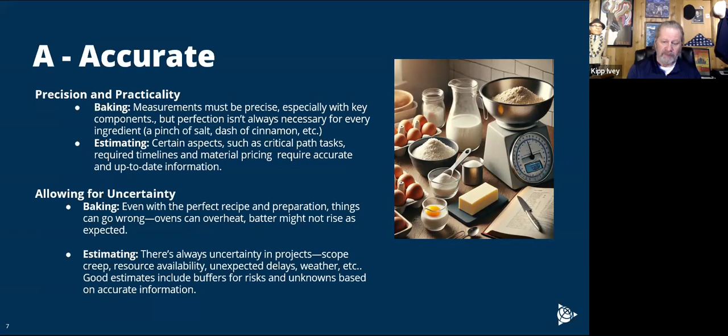And we will be providing some tactical tips and best practices for you, just as recommendations for how you can really revolutionize your estimating practice so that you are able to deliver those complete, accurate, knowledge-based, and effective estimates, and ultimately have more success through projects and achieve the ROI you're looking for as well. So stay tuned for the end of our webinar. We'll be walking through some practical tips and tricks as well.

Yeah, and you're right. The goal here is we're gonna walk through this. We'll talk about the acronym that we're actively working on right now, and then we're gonna dive into the software and try to show you some nuances of how we can put the information together using some of the tools that I have available to me today. Because like Caprice said, when you think about an estimating solution, the ROI for the estimating solution is all about time, productivity, and accuracy. Those are the three components of how an estimating software pays for itself. And we'll cover that as well.

So when you think about knowledge, right, we already talked about adjusting when necessary. But more importantly, just like cake recipes are handed down generationally, across families. As a matter of fact, my wife for the last number of weeks has been going through boxes and boxes of information and finding recipes from her grandmother and her mother who recently passed away, and my mother who had passed away. And you can tell whose recipes they are by the handwriting. For her, it's a very emotional thing, right? Because those recipes were handed down throughout the generations, and in the world of construction, the same thing exists with knowledge.

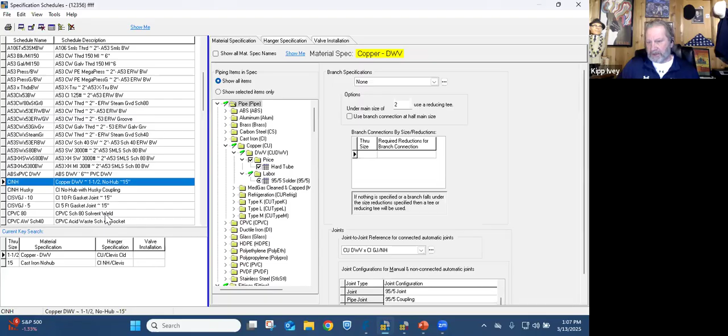If you look at the cast iron no hub spec, right? 1.5 inches down is copper DWV. Anything larger than that is going to be cast iron no hub. This information, once again, is out of the box. And you can tweak these. I can certainly click on any of these specifications. I can duplicate it and then edit it and create my own spec for my own organization based, once again, upon your knowledge. Because like I said, this is a very integrated platform.

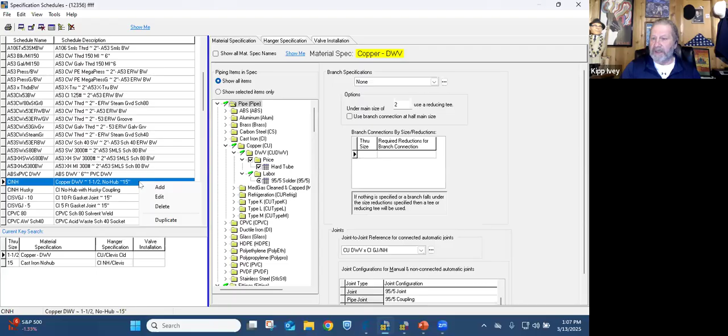If we get out of the specifications and you start thinking about, well, what else do I need, right? Obviously, labor is a huge factor. So out of the box, you could have multiple labor books. Those labor books, for example, could be PHCC. We have what we call our standard labor base, our labor tables, as well as you can bring in the MCAA labor tables, and even now with the new database, you can bring in the MCAA WAM labor method.

Obviously, you have to have access to the MCAA labor rate for us to give you that information. You have to have access to the PHCC labor book for us to give you that information. But these labor books can be built for you, and you can create as many labor tables as you want so that you can adjust them, once again, based upon your knowledge. But out of the box, we're giving you the right ingredients. And from there, you're going to tweak those ingredients for your organization and how you're going to use the software.

Now, accuracy. I think the easiest way to talk about accuracy is hangers. So I'm going to go into takeoff here, and I'm going to show you something. All right, let's go to a different job. Helps if you do the right things, right, Kip? Let's go to a recent project. Let's go to a project that's got a little more information on it.

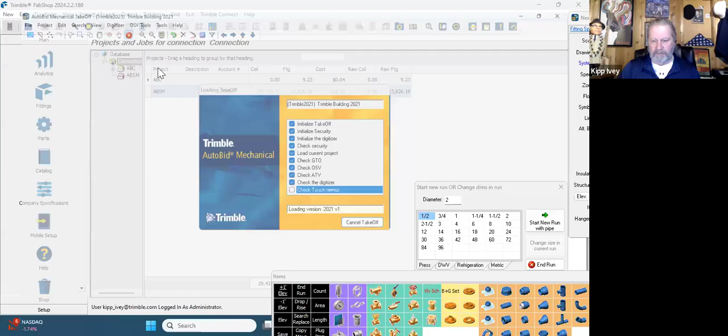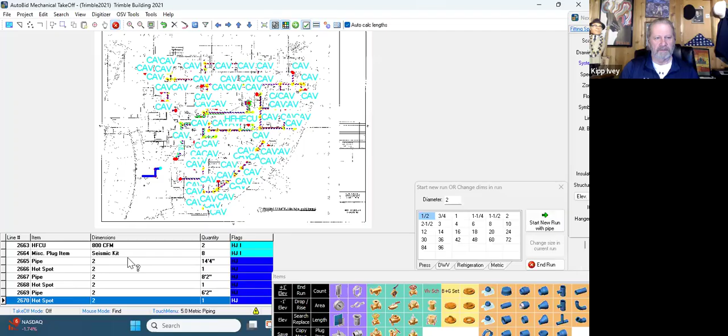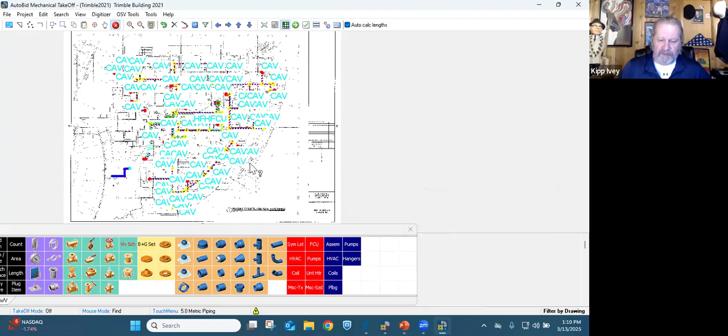All right. I'm going to zoom in on this drawing here. Maybe. Everything is off my screens here. There we go. All right, so in this particular drawing, we've got pipe valves and fittings, and it will not let me zoom. There it goes. I guess the graphics need to get caught up with this, Caprice.

So here we're sitting here, and I'm looking at pipe valves and fittings. So I can look at this particular system and I can simply touch on that, and it tells me, for example, that is heating hot water supply, copper by butt weld, 2 inches down is copper, everything else is carbon steel butt welded pipe. I know that it's on the 3rd floor. I know what drawing it's on.

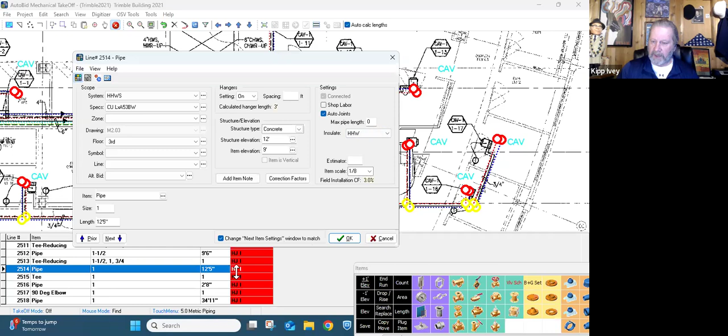I'm creating accurate information. I'm automatically creating joints, and I'm also automatically creating hangers. Because you'll notice down here it says HJI. It means I'm creating hangers, I'm creating joints, and this pipe is insulated. So you're going to get your saddle shields that go along with your hanger components.

But unlike some, when you start thinking about hangers, many of us that have estimated manually in the past, we take lineal footages of ductwork or lineal footages of pipe, and we say our nominal spacing is going to be 8 feet. And we simply say, oh, I've got 240 feet of ductwork or 240 feet of pipe, and I divide by 8 feet, and I'm going to have 30 hangers.

Now, that may be good enough if you're going to do a quote, but if I'm going to do an estimate, I need to understand changes in direction. I need to understand fitting placement. I need to understand, is that pipe vertical or horizontal? I need to understand the length of the hanger. In our estimating world, I will give you those extra hangers at the change in direction, knowing that I have to have a hanger on both sides of a fitting. I'm going to turn off hangers in the vertical, turn the hangers back on at the top as I rise, let's say.

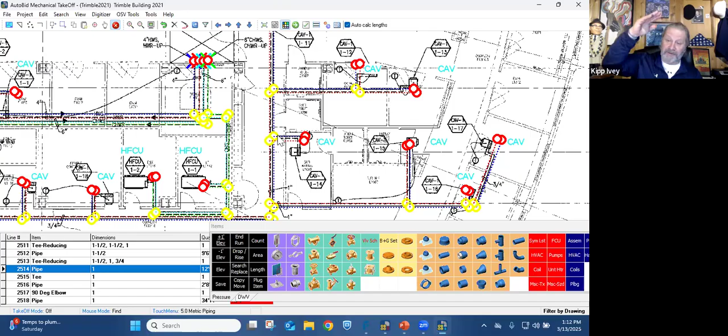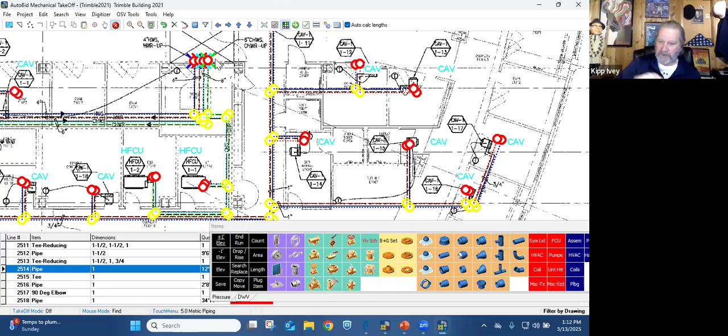And let's say it's a 15-foot structure and I'm hanging pipe at 8 feet. So I'm going to generate a 7-foot hanger. And now all of a sudden I go vertically, which is what this X stands for. I go vertically, and now instead of hanging that pipe at 8 feet, I'm now hanging at 10 feet. And the hanger is going to go from 7 feet to 5 until I go back down. Because we're going to generate an accurate hanger count. We're going to generate an accurate bill of materials based upon what's actually occurring in the field and not just some arbitrary number.

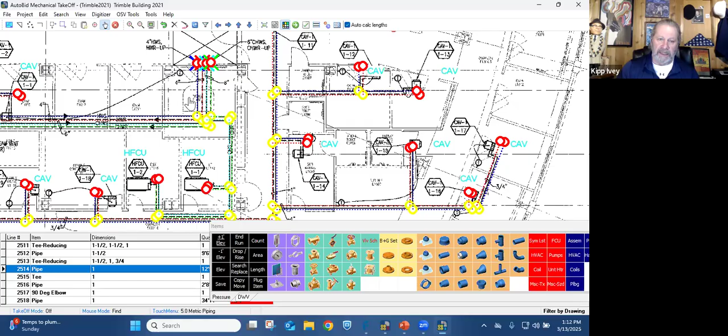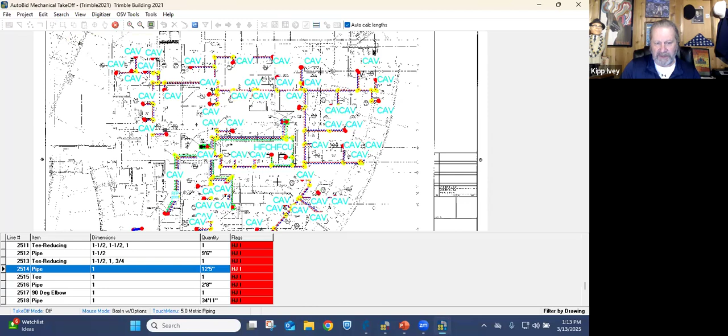Now, if I needed to adjust something, I know, for example, this is heating hot water and it's insulated. Well, what if they came out and said it shouldn't have been insulated, it should have just been bare pipe? So at that point, we start talking about how I can apply my knowledge into the software. How can I make adjustments, right? This box in feature is one of those tools. So if I hit this box in feature, I can drag a box around it, and it's going to ask me, all right, what do you want to do with everything that's contained within that box?

Now, what I'm showing you mechanically is exactly how the sheet metal works. So whether you're working on the wet side of the industry or the dry side of the industry, it does not matter. This feature is ubiquitous across both applications. So I can zoom in on an area, I can delete that pipe, I can create an assembly of that pipe. If you remember, we started talking about making sure I have the right ingredients. Do I have the right historical information?

Anybody that's worked in the mechanical industry knows that when you put in one heat pump, you probably put in 100. So why not create an assembly of a heat pump? Or, once again, if you know your job and I look at my plans and specs, I'm constantly, as an estimator, looking for commonality because I want to increase my efficiency as an estimator the most I possibly can. So by zooming in on something, I could create an assembly of an entire floor, let's say if I had common floors across a high-rise structure, or an assembly of that heat pump, or of that air handling unit, and I can save those assemblies for future use.

Now we're shipping you probably close to 100 assemblies already predefined, but you can create them on the fly. You can create them to keep for future reference, for the historical information, that historical metric. So that knowledge can be passed down generations, just like recipes are passed down from generation to generation. If I can create an assembly of an area, of a bathroom, I can have assemblies in my assemblies.

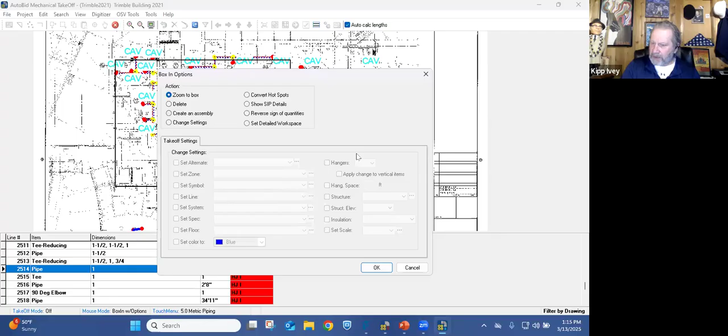But what if I want to change my hanger spacing in that location? Or in this instance, I simply just want to change the insulation from heating hot water, chilled water to none. The minute I do that and I recalculate this job, everything around my hanger components, my saddle shields will drop because I don't need them anymore. Right? I don't need the shields for the insulation.

So all that happens for you automatically, and it gives you the ability to impart your knowledge of how your company goes together and the appropriate specifications into the drawing, either as you're estimating it or as you come back after the fact.

Now, I talked briefly about, I said, hey, I took it off a welded pipe and it should have been grooved. We have a function called SIP details. If you're familiar with MCAA, they have a thing that's called short interval planning. It allows us to very, very quickly simply say, create a profile, welded versus grooved, and then we will calculate in the background for you automatically and show you the cost and labor difference if I go welded or if I go grooved. It gives you an amazing tool for doing that value engineering on the fly, or even coming back after the fact.

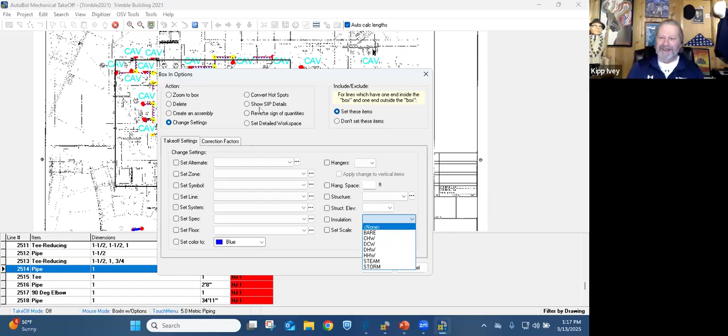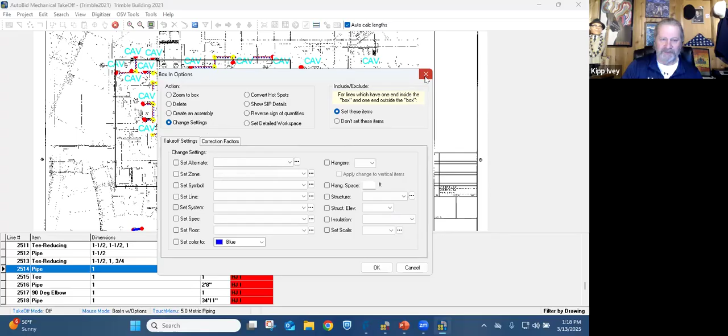So this gives you the ability to adjust that information to make up for your own mistakes. And it's a very powerful tool. And really, to be honest, we're the only estimating in the industry that has it. So all that information comes up to, well, am I getting the right effect?

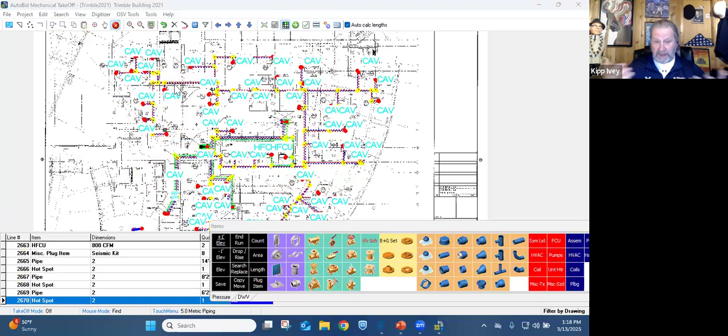Now I'm going to show you something else. I'm going to jump into AutoBid Sheet Metal. And you'll notice that AutoBid Sheet Metal looks just like AutoBid Mechanical. Got the same color scheme, so forth and so on. But does it have the right effect? So if I look at this particular project, this is obviously a sheet metal drawing, not a mechanical drawing. One of the great aspects of the sheet metal world is we pretty much are the only trade in the industry that makes everything we install. We take raw materials, we take 2D flat sheets of metal and we turn them into 3D objects.

And one of the great aspects of an estimate is not only do I have to have the right pricing, like in the mechanical space, we have an application called Tracer, where you can send that information out to ensure you're getting the most accurate information you could possibly get in relationship to your pipe, valves and pricing today. We have a national agreement with Ferguson, so you can send that information out to Ferguson. Ferguson will price that project for you and send it back. So you have the most accurate, up-to-date pricing you could possibly have today.

In this instance, am I making the ductwork appropriately? Am I getting the appropriate seams? Is it large Pittsburgh, small Pittsburgh? Is it snap lock? Am I getting on medium pressure? Am I getting my ductmate, or my TDC, or my TDF? Is it finishing at 60 inches, 56 or 56 and a quarter? Am I getting trapeze hangers versus hanger strap if I'm going to medium pressure? Am I getting the interstitial supports on the wider iron, especially in the medium pressure world? All that happens for you automatically, and we're giving you that information.

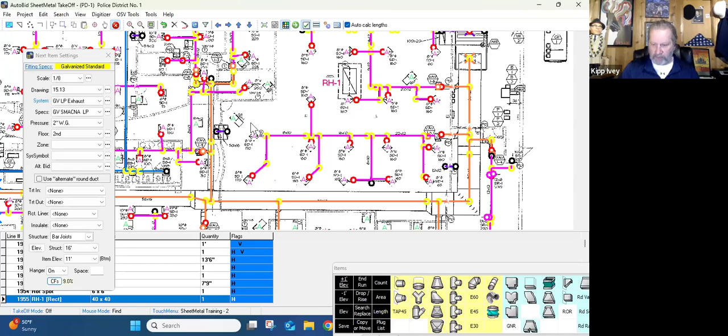But in the sheet metal world, the holy grail has always been, I want to fabricate this as fast as I possibly can. Now I understand that not every project goes in like it's drawn, but sometimes it's easier to edit than it is to create new. So I'm going to export out of this, and I'm going to go right up here, File, Export, and I'm going to say Export to Trimble FabShop.

Now, FabShop is one of our tools that allows us to basically fabricate. We're the OEM software for Engel coil lines, plasma coil and plasma tables, and Lockformer coil lines and Lockformer plasma tables. So if you have one of those already, you already have our fab. So I'm just going to create over here, and I'm just going to export this, and I want to export all this ductwork, and I simply say next.

And it's working. All right, and I think we're done. Maybe. We're still thinking. So Caprice, while it's thinking, you have anything you want to add?

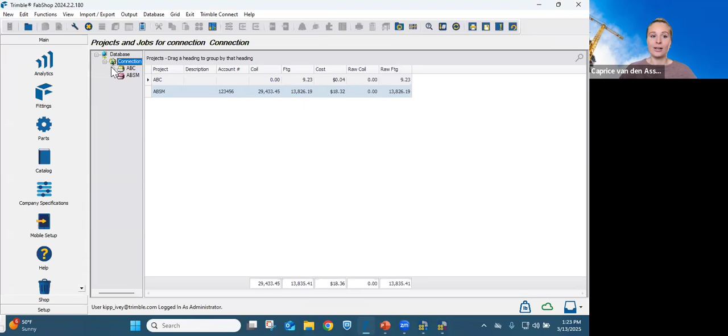So it does give you the ability with Trimble Fab to actually export from AutoBid Sheet Metal into the fabrication software and import everything that I just estimated. Now, some people ask me, Kipp, why would I bring in ductwork that hasn't been coordinated? Well, not every job needs coordination. Not every job goes through a BIM process.

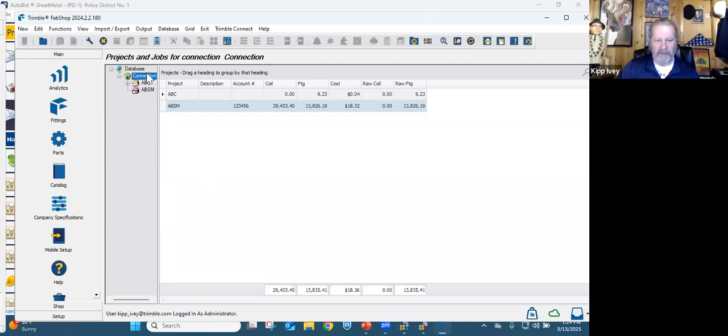But by bringing that information into Trimble Fabrication, I can bring in the estimate, the pipe or the duct and fittings into the Trimble Fab software. And I then just have to edit the fittings on the back end rather than manually input them over and over again. I can do in minutes what would take somebody potentially hours. So at this point, right here is my project. There's the project that I imported.

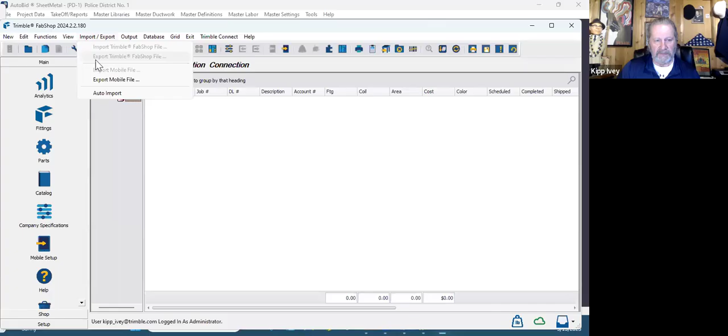All right. Let's go ahead and import a project. Let me import a file. There it is. Nope. My import is turned off. So, my bad. Nothing's perfect in this world. I was gonna say, sometimes you're missing an ingredient when you're baking a cake and you have to improvise, you have to adjust, right? When I tested it the other day, it worked just fine, and today it didn't. So that's probably on me.